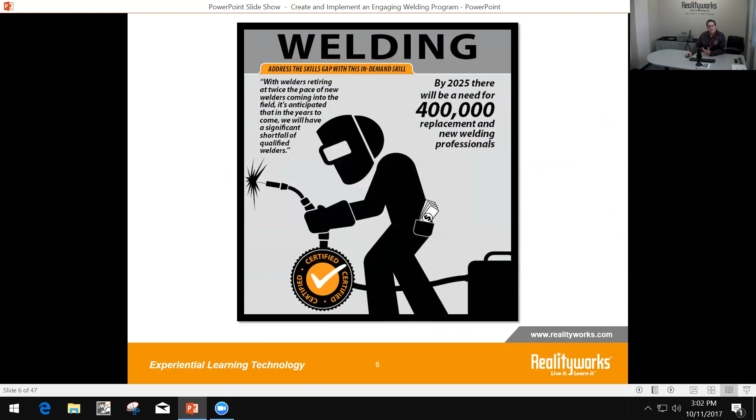One of the things we have seen is in today's high school welding lab, there's about 8 welding booths, about 22 students per class. Now if you go into the tech colleges today, you probably can double that in the welding booths to about 16 to 20 booths, but still an average of 22 to 30 students in a tech college. So the amount of students per class is really the same, but the amount of welding space you have varies. I travel the country and have seen everything from one welding booth all the way to beautiful institutes that have 20 to 25 different welding booths.

At the same time, the type of students that we get are those who like hands-on work. They like to be able to see what they're doing, interact with their training, as well as getting themselves that understanding. And one of the things we have seen is the lack of instructional material, lack of different types of teaching and training tools to help you educate students in this welding world.

So what we have created is wrapped around different products into our RealCareer welding solutions. This is kind of the 21st century welding training program, where we begin with a product called guideWELD VR, which is our virtual reality welding simulator. It gives all the knowledge of correct technique and how to do welding without the cost of materials, without the cost of consumables, and in a safe environment, learning the technique that's needed.

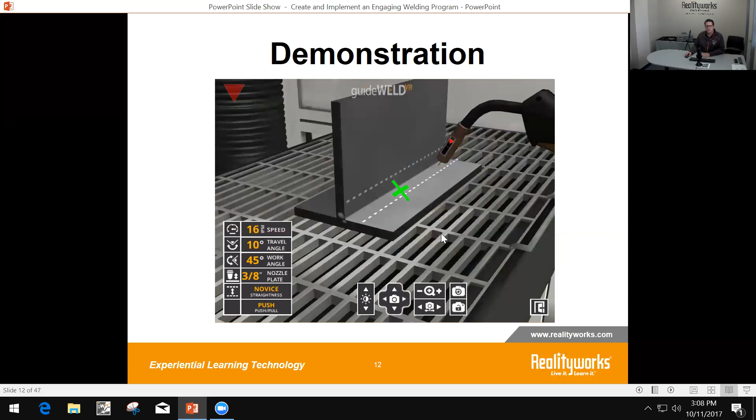Now every time a student does a weld within the simulation, it allows the student to then be tracked. Our product has actual tracking capability when they do a weld, tracking the work angle, the travel angle, the plate distance, the speed, and the straightness. What comes from this is an actual assessment. Every weld a student does gives you a score, including work angle, travel angle, plate distance, speed, and straightness. Depending on how you do, it grades you based on all those different parameters and values, and then gives you an overall score.

Now the great thing about this is there are different levels. We have a novice level, which is a beginner level, an intermediate level, and an advanced or expert level. This allows you to hone your skill as you get better. If you're getting into the 90s and 100% on your welding technique in a novice level, you can then change the student to an intermediate level. That allows them to have tighter parameters, which also makes them become a better welder. So it's kind of a step-by-step process of doing that.

Now, from a teacher standpoint, our products are great at allowing you to have customizability. You as a teacher can put in your students, just like you would with a username and password for an email. Your students can then log in on their own and get into the software. You can add assignments, take assignments away, and do different thicknesses, different metal types, different MIG or stick type welds for your students.

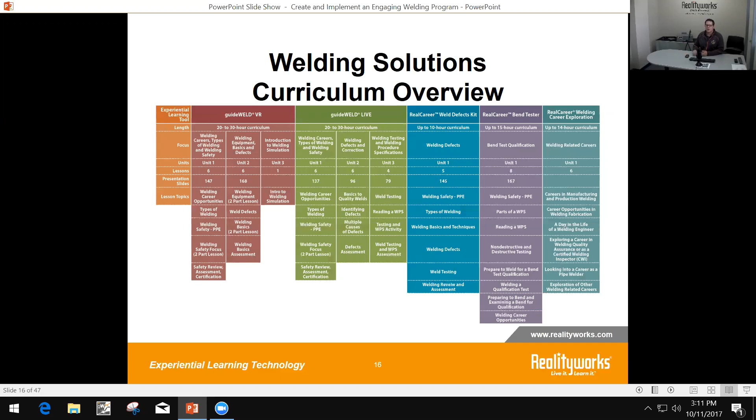It's a little small to see here, but it's all involved with curriculum alignments. We are Common Core Standard Correlation and tied with their Common Career Technical Core as well. So those different features are all wrapped into the standards.

Some examples in our curriculum: we have teacher guides, we have worksheets, we have fact sheets that help the student that you can print out and have for the students. We have exams, we have quizzes, and we also have PowerPoints. So you can go through all these different things with your students.

So it's fully wrapped up as not only the product of learning how to weld correctly through guideWELD VR, but also including curriculum and different activities to really get their knowledge of welding to where it needs to be. Now, from virtual reality welding, we found that it actually, simulation helps enhance learning.

Through a study from Iowa State University, we've seen studies on simulators with students where they have traditional training - you'll see that in blue here - where traditional training is classroom work and then going out to the shop to do actual welds. Virtual reality integration is where you do the classroom work, include virtual reality training, and then go out to the shop and do actual welds. So you add an extra piece in there.

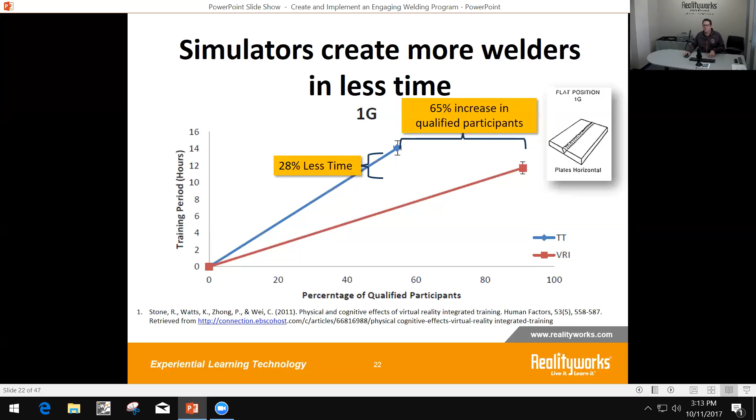When you do that, what they found is that in less time, more people are actually qualified - a 65% increase in qualified participants, and also 28% less time. We also see that in both horizontal and flat position welding, by including virtual reality into your teaching and training, we were able to get more students qualified as welders and also do it in less time. Even though you're adding virtual reality into the amount of time and practice they get, on the back end they will have the understanding and knowledge base a lot easier and a lot better.

We've also found from different educators that the cost can be a great savings to them with virtual reality. By having students practice over and over again in the virtual world, they can hone their correct technique, not have bad habits, and save on consumable and welding costs. The time in the booth then is getting a student who is much more prepared, much more of an expert at that level once they step into that booth because of the virtual reality welding.

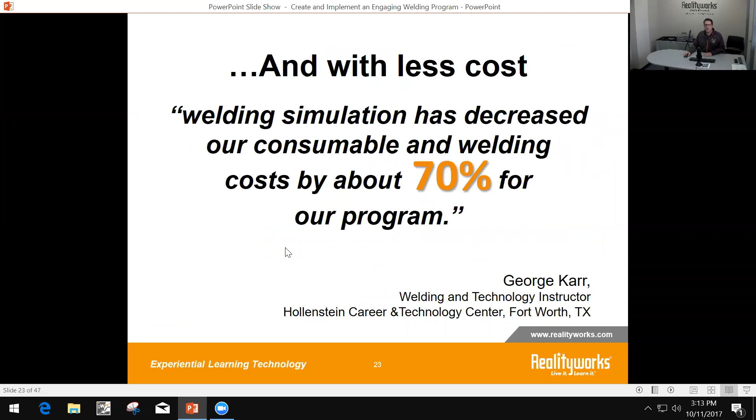Now, this is also seen in what we call simulated arc time - how many minutes are your students actually getting into the booth? Well, if they're getting into a regular booth and you have 8 to 10 booths in your school but you have 20 to 25 students, not everyone's going to be able to get in the booth. So by using virtual reality, you can increase your arc time - instead of 5 or 10 minutes in a booth and then having to come out for somebody else, they can get up to 30 to 35 minutes in a 45 to 60 minute time.

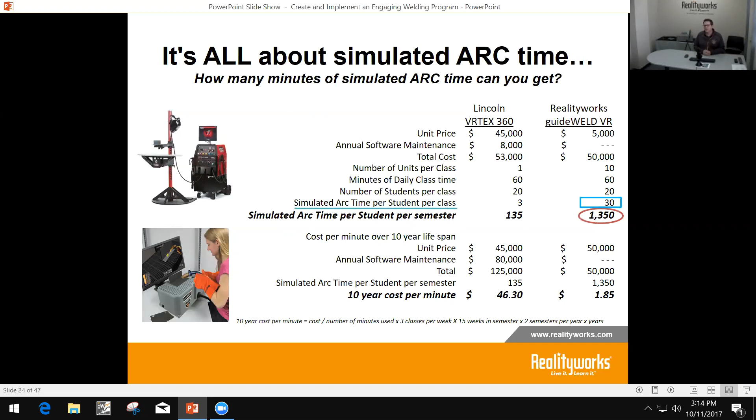At the same time, over the course of a semester or a year, the amount of simulated arc time is just widely much bigger in the sense of the amount of time they get doing simulated arc time and actually getting under their hood. Now, they still have to go and do the real thing - we want them to do the real thing - but the amount of time that they actually get and the cost versus other virtual reality simulators out there is immense.

Now, I want to talk about another product we have in our time here, and that's guideWELD LIVE. This is a product that came from our instructors actually saying, hey, we love virtual reality, it makes sense, it's helping our students.

But once they get into the booth, there's still the sparks, the sound, the heat. There's a lot of things that can throw them off. We want to increase and have a standard ability that they can actually be able to weld every single time.

Now, all of this is going to be focusing on your work angle, your travel angle, and your speed. So depending on what that is, it will tell you through the use of icons and guides if you're going too fast or too slow.

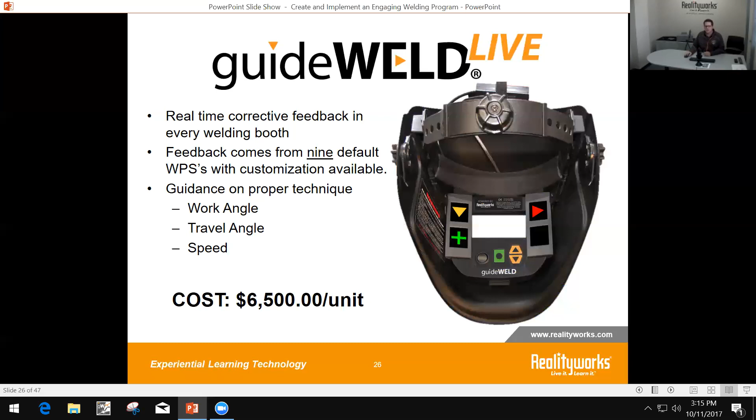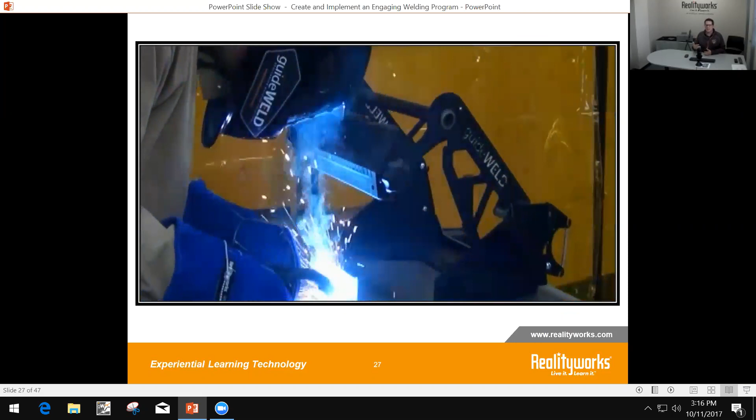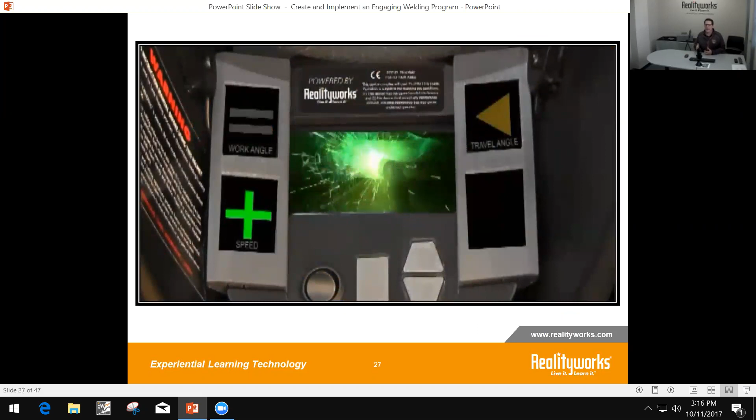So in this case here, we have a little video showing actual welding with our Guide Weld helmet. Once this person is welding, you look inside the helmet. Inside the helmet, as they're doing their weld, they see their travel angle, their work angle, their speed, if they're going too fast or too slow. If they're going too fast, they need to slow down. If their angle is off, it's going to tell them which way to turn or move their welding gun to make sure they're in the correct technique for the weld.

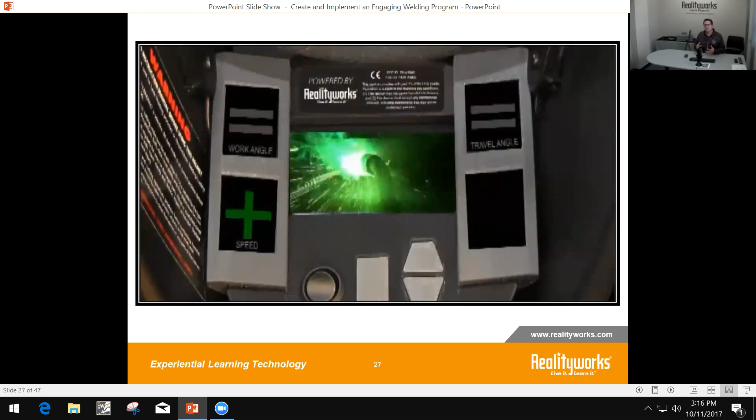So this is all available as a product that helps students in the welding booth be able to do welds. Now, like I said, all this guidance is based on WPSs. We actually have different WPSs, and you can customize WPSs as well to allow students to go in and know what their speed should be.

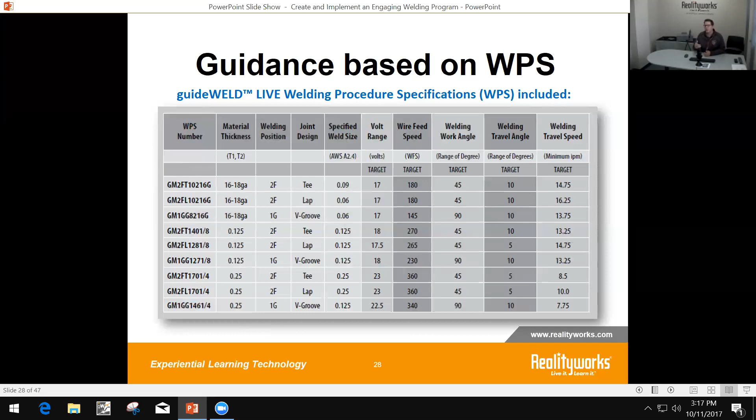When they're doing that first weld, how fast should I be going? Did I waste a whole piece of metal because I was going way too fast and didn't realize it? Using our helmets, you can actually make sure your speed is correct the whole time you do it. So it works on consistency. It works on standardization of your students' ability there.

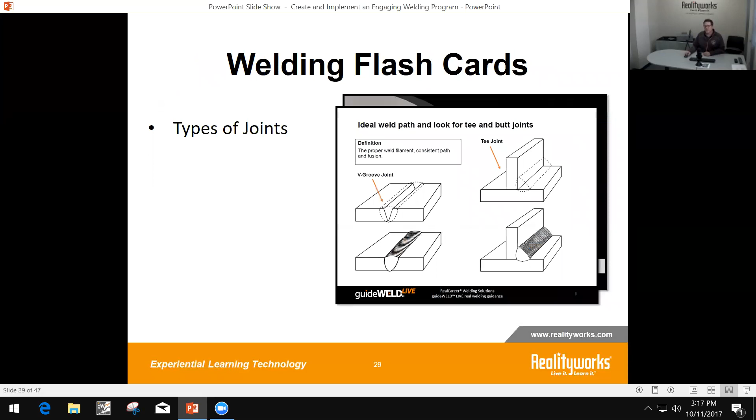Now, with this Guide Weld Live, we also bring things like welding flashcards with the product, where you can see the types of joints, the types of defects, and then it gives a definition and a cause. One of the things that we really are training is not only the technique, but getting that knowledge base of proper welding methodology, proper welding know-how in what to do.

Now, we have some other products that are also in the welding world. One of them being our RealCareer Weld Defect Kit. The Defect Kit is a very unique kit where it's 13 different welds, one of them being a quality weld, and 12 of them having some sort of defect.

Now, all these welds were actually welds done by an AWS Certified Welding Inspector. They created the bad welds, and then what we were able to do was take a mold of those bad welds with all the details of that bad weld and then create a plastic mold of that weld. This allows students and you to be able to see these welds, be able to look for the defect, and the great thing about this is your students can see an actual weld defect.

And then we have flashcards, we have posters that work with the student. We also have a curriculum that helps them visually inspect and then figure out, okay, because of these types of defects, what do I need to do either with my machine or with my technique to make sure that I don't do that again? And so they start to understand and be able to visually see, here are the defects, and this is how I correct those things.

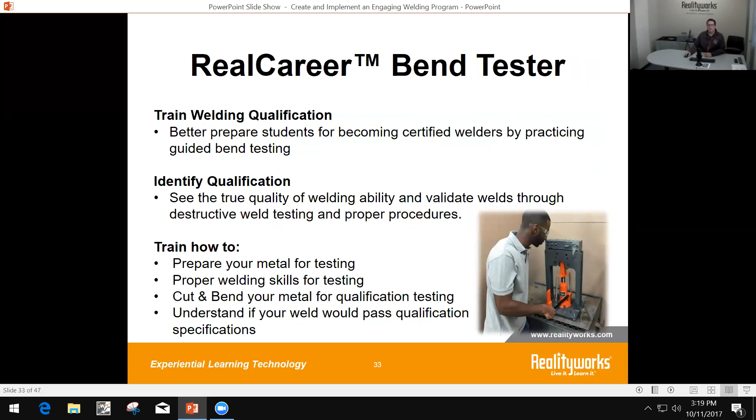All right. Now, another product that we have in this inspection world is the RealCareer Bend Tester. This is just that it is a manual bend tester, a guided bend test that allows your students to prepare your metal, do a weld, and then test it to see would it pass regulation. Now, in this case, would it be a qualified weld? So one of the things wrapped around this is that it all passes, and it's all based on AWS's D1.1 code for guided bend tests.

One of the great things about the curriculum is that it not only tells you, the instructor, but also teaches the students what the expectations are, how to cut your metal, how to position it, the right grain direction, how to actually do the bending when you weld, and then afterward qualification—how do you know if it passed, if there are cracks, how big a crack can be and still qualify, how many cracks are allowed.

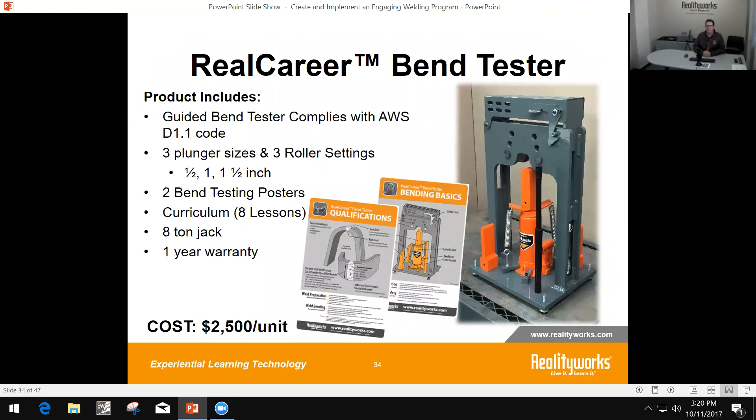All that information comes in the curriculum, the posters, and you also get the bend tester so your students can practice over and over, getting them ready to go out and get that job, knowing they've done these welds and passed them. It's a great product to help qualify your students' welds.

Another feature we have is our portable workstations. We talked earlier about the 8 welding booths for about 22 students, and one problem is space—we all understand that. So we brought out portable workstations, giving you a choice of two: a small portable workstation that can fit right into your welding booth.

We also have a larger portable workstation that can be a great demonstrator piece—students can gather around to see it, or if you need another booth, it's there with protective gear so you can actually use it as a standalone booth.

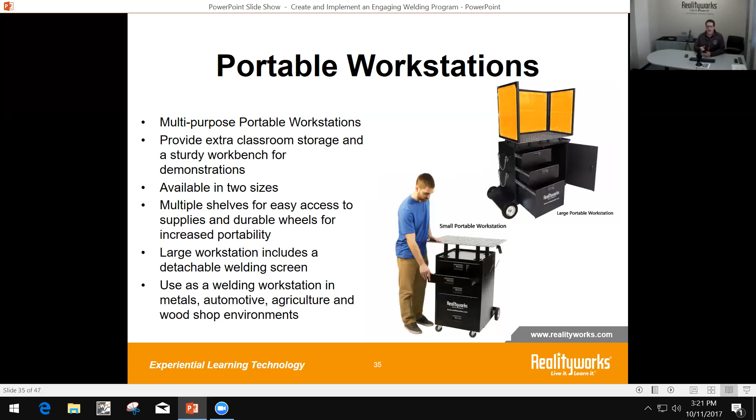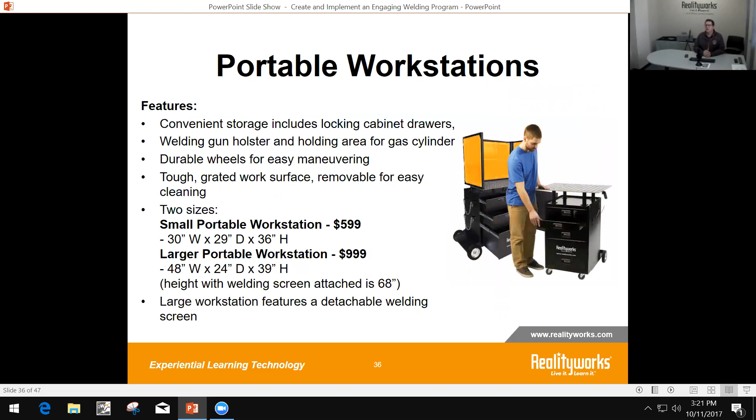Both come with a lot of storage, are very sturdy with a great grated top, so you can actually use them in your shop. They come on wheels so you can roll and move them as needed, bringing them back and forth between classroom and shop. So we've got a large and a small portable workstation, two different types for you to use based on the needs you see in your shop area.

You plug it into our DC powered assessment kit, it powers up the wall, and you can see if you did things correctly or incorrectly without any shock or issue. You can use this product to do up to 16 different exercises—wire one exercise, and the assessment kit tells you, once you plug it in, if you wired it correctly, and if not, what you need to change.

Once you've completed one type of wiring, you can move on to another and continue through 16 different exercises in that world.

Lastly, I want to talk about another product we have: our employability skills product. One thing education can sometimes forget is that students may have the skill, but can they get the job? That's why we brought out our RealCareer employability skills product—they have the skill to weld, but can they actually get through an interview? Can they actually hold a job?